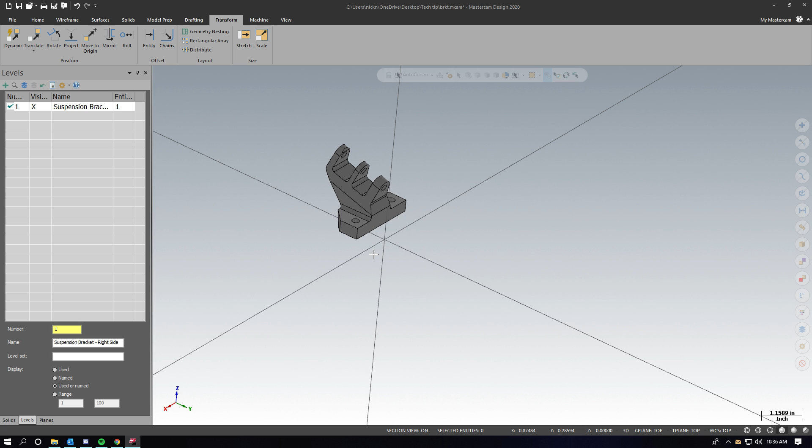So I figured we can make a quick tech tip video on how to bring in vise jaws into your part and set it up so that you can check your holder or your shank to the fixture, to the vise when you're doing a verify of your operations. So I'm going to start with this part we see here. It's a Formula SAE bracket from Mastercam's website.

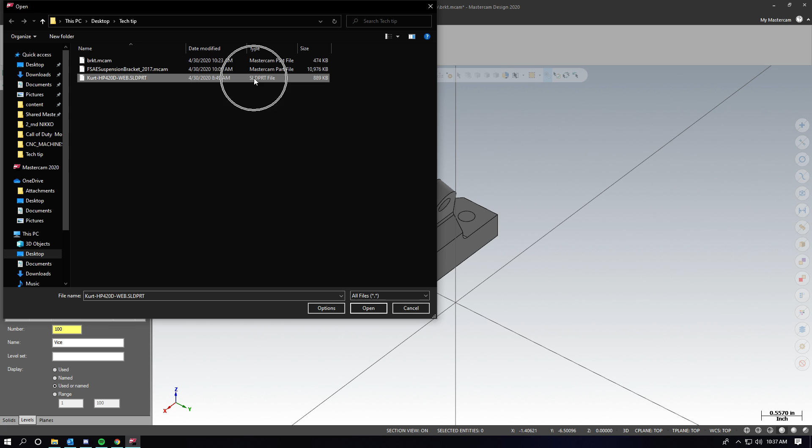When you're bringing in a SolidWorks part file into Mastercam, if it's from, say, SolidWorks 2020 and you're bringing it into Mastercam 2020, make sure you have your first update done. The first update gives you the translators you need to get 2020 part files. Otherwise, you have to bring them in as step files.

So if you're ever having issues bringing in a SolidWorks file, give us a shout. We can help you out there. But most likely we just need the latest update of Mastercam done, and there shouldn't be any problems.

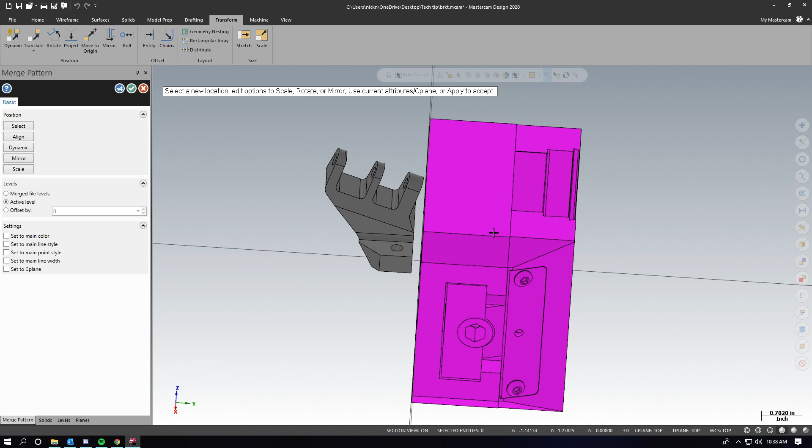So you'll notice that the vise came in at the wrong orientation. That's okay. We're going to move it around using the dynamic translate. So before I hit OK, active level is pretty important. What that does is that level we made before we brought it in, that makes sure that all the geometry will go on that level. If not, it all gets spread out into individual levels, just the way that they designed the vise in SolidWorks with the different features.

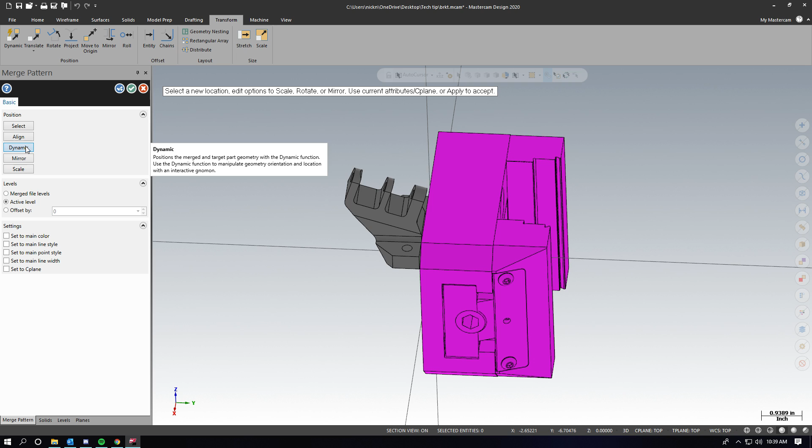So we'll say active level. And we can also dynamically move the geometry right from here, but we're going to do it after. So all the different levels, but everything got consolidated into our level 100. So we can delete everything. We'll just say right click, clear empty levels, clear all.

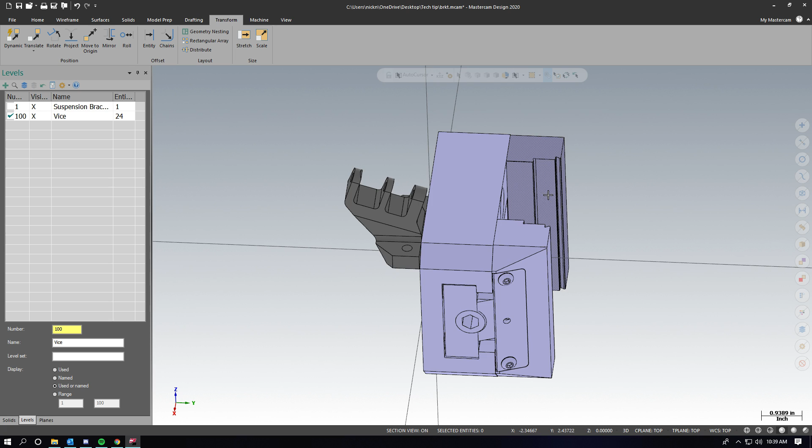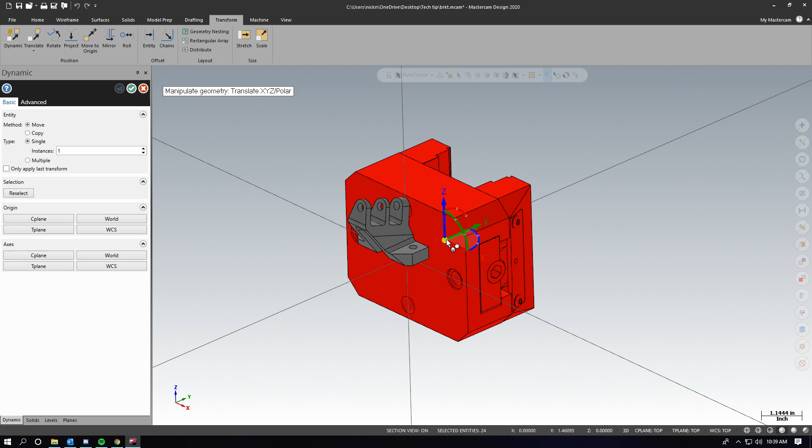Now, let's move this out of the way. So what's nice about using the different levels is we can just right click and say select all. Oh, there's our vise. We'll go to transform and dynamic. We'll grab the center of it. We'll just bring it down. Now it's out of the way. We can spin it.

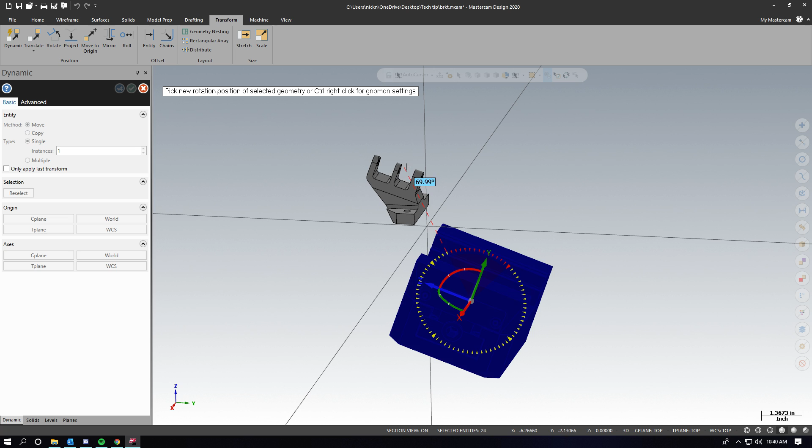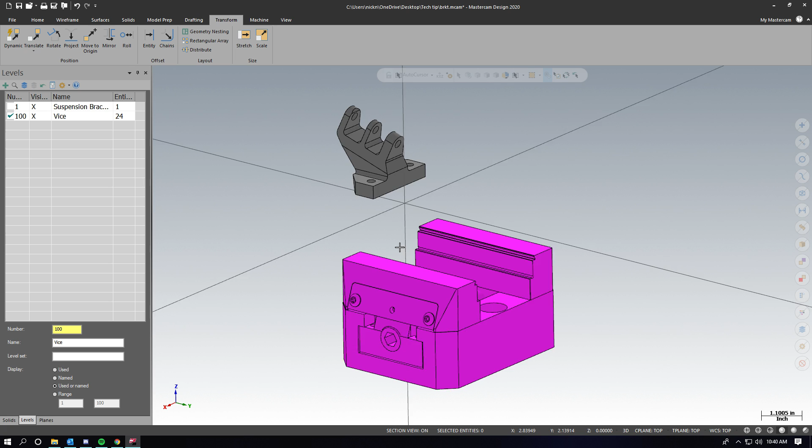Now if we use these tick marks, we'll snap every 5 degrees. If we move our cursor out, we can kind of get any degree we want. And if we just start typing, hit enter a few times, we can go right to 90. When I look at it, I think I want to spin this.

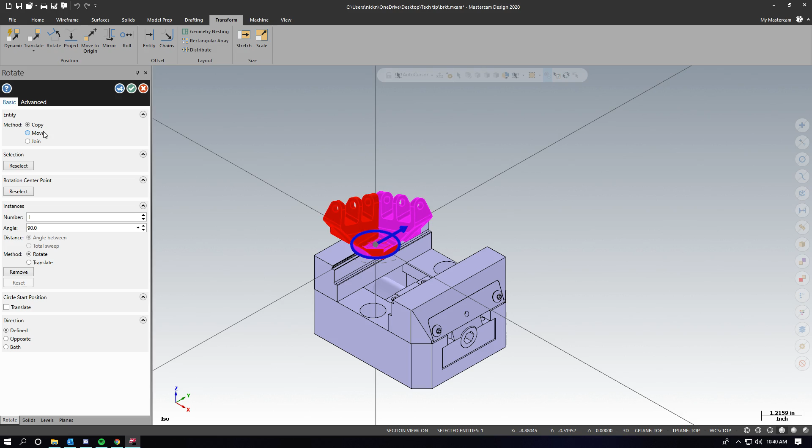So I'm going to say rotate. And I'll rotate it 90. Same idea, we can just type the number in, hit OK. I think I went the wrong way, so I think I'm going to do that one more time. I'm going to say rotate, I'm going to hit the part. This time, I'm just going to go 180.

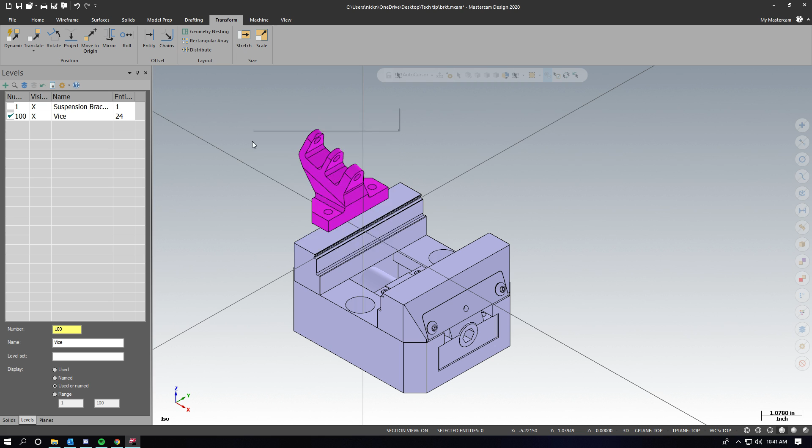It's nice to get familiar with these transform features. Being able to move the part around is pretty important. So we're not going to worry too much about our origin right now. Since it's going on a 5-axis machine, we're going to use our center of rotation. We're going to do that later though. So I'll just turn off the gnomon.

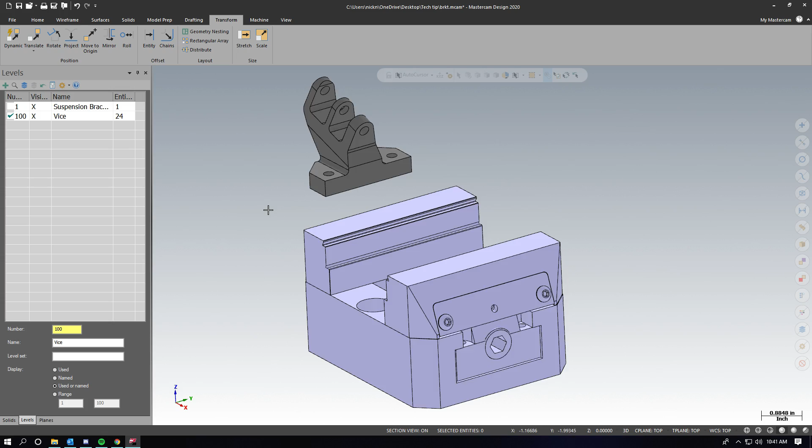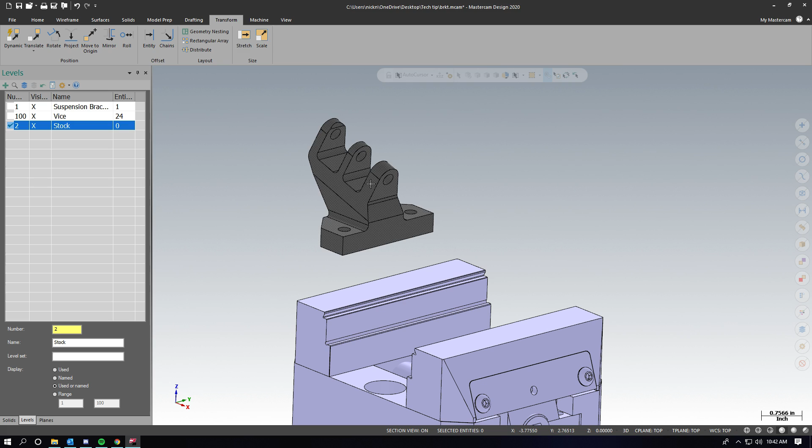Now, we're going to have to set up some stock. The best way to do this is using a bounding box, but again, I'm going to make a new level first. So, new level, stock, select my part, wireframe, bounding box.

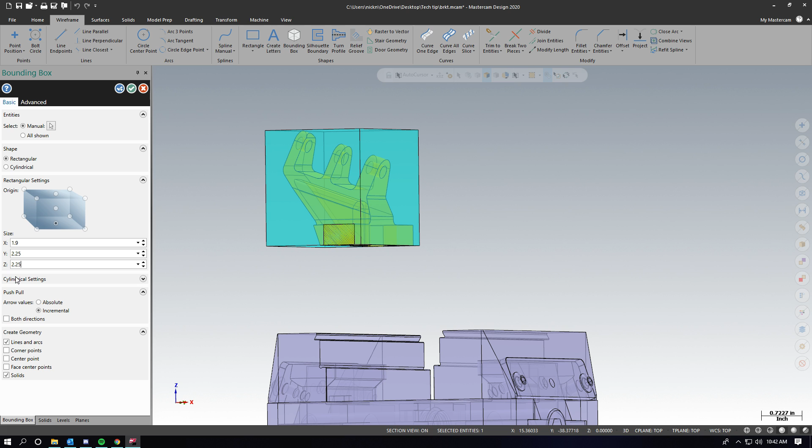Now, I'm not going to get too crazy with this, but our X, we'll give it a little bit extra there. Let's call it 1.9. Our Y, 2.25. And then our Z, give it 2.25 as well. I want to make sure solids is on, and I want to make sure lines and arcs is on.

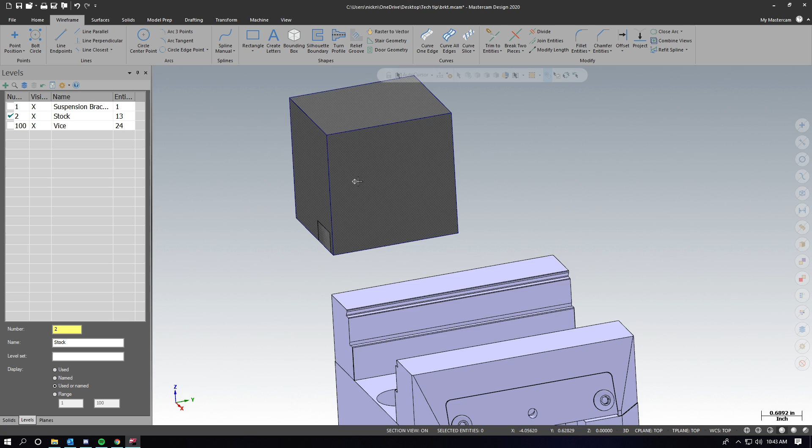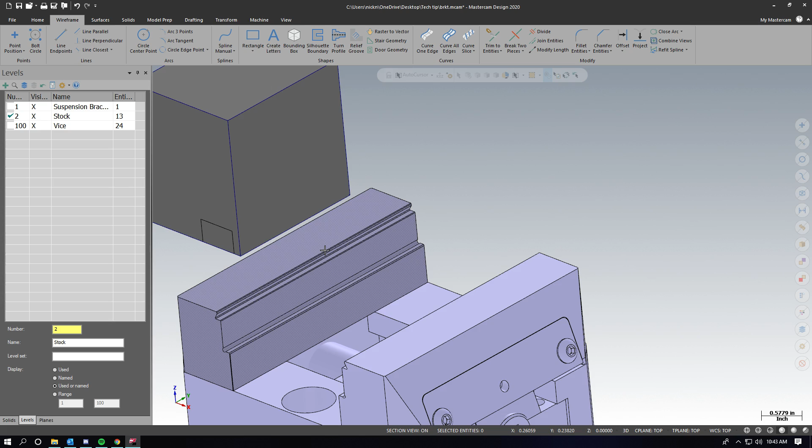So now that I have my stock set up, I'm going to move my vise to fit. I want my part in the center of this vise, since they're just going to clamp down in the center. So one way to do that is to find the center here. Now this will snap right to my midpoint.

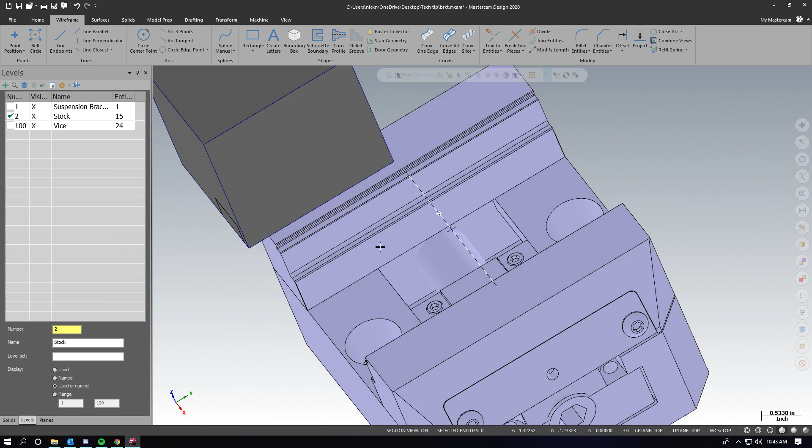So there's the center of my vise. I'm just going to have the top jaws grab it for now. Obviously, there's 10 different ways we can do this, and we're probably going to want to hold on to a little bit more than just that. But for demonstration purposes, this is what I'm doing.

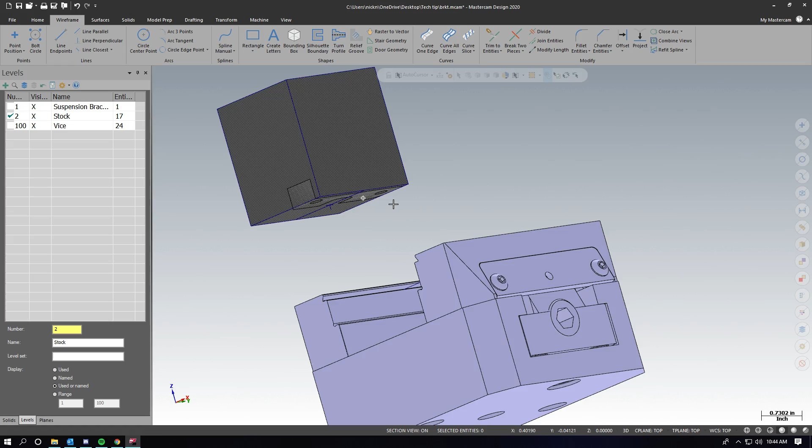Again, just finding center. I'm sure Eric will make fun of me for drawing lines, but that's okay.

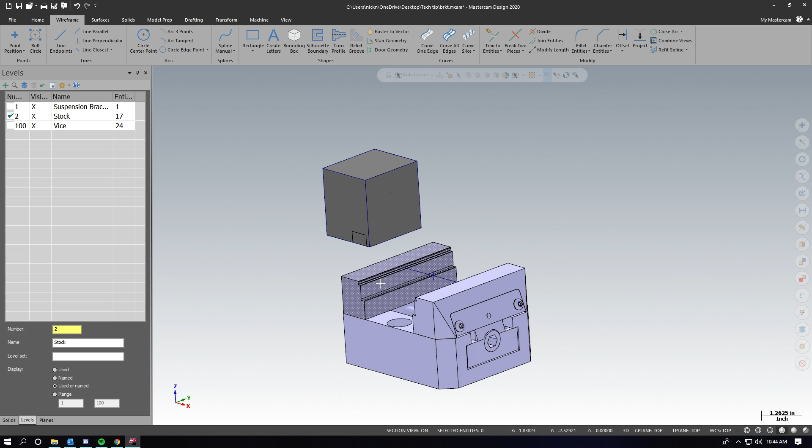So let's move our vise now up, and we're just going to grab onto the part. So since it's all one level, I think I'm going to put these on separate levels so it's easier to move them. We'll cross that bridge when we get there though. So I'll say transform, dynamic one more time. I'm going to put my gnomon right on my center point. I'm going to move that right to my center point there.

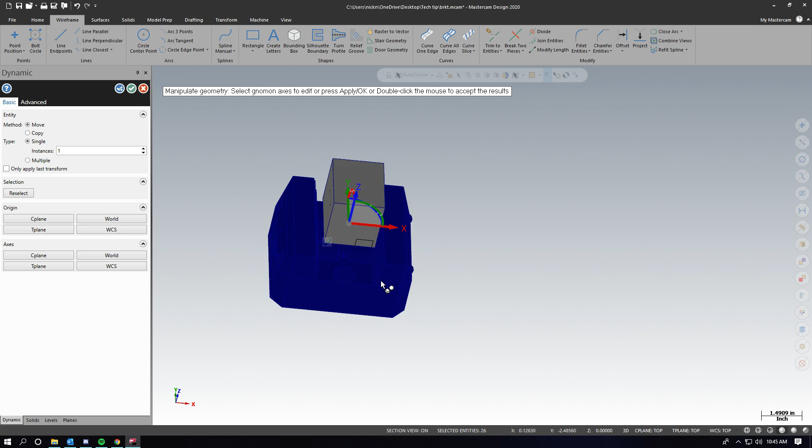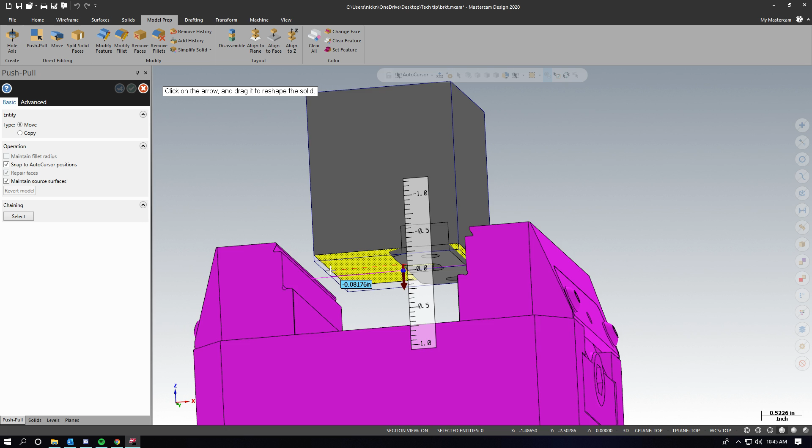And you know, I'm actually going to call a little bit of an audible here. I'm going to take my solid and go to model prep, push and pull. I'm going to move my stock down to here.

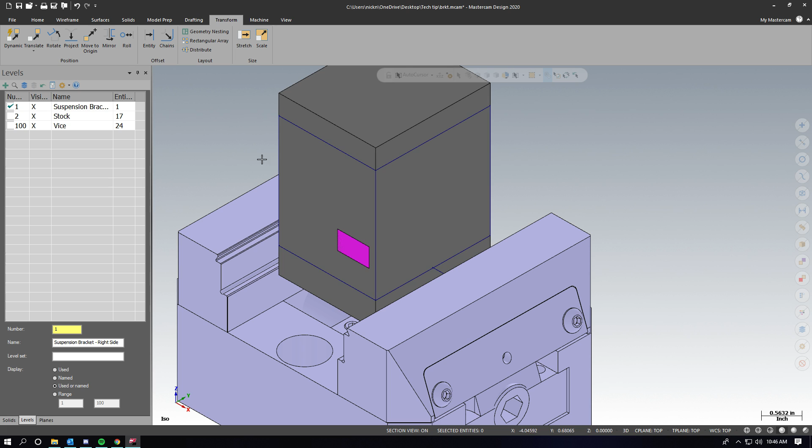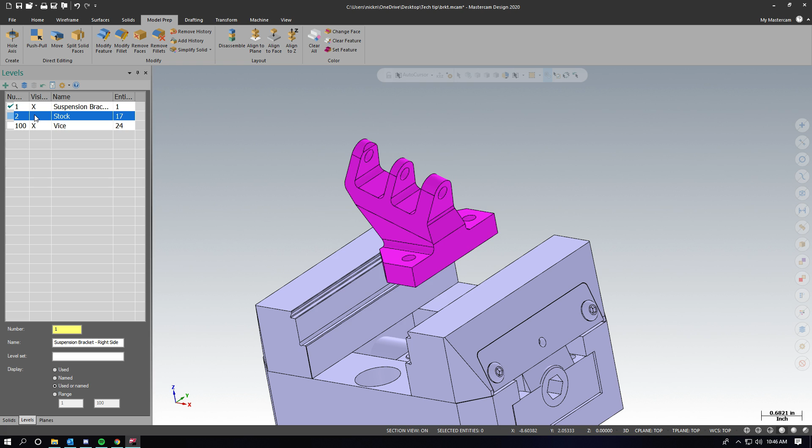So what I just did, I'm just kind of moving using some model prep tools. I can push and pull my stock right now and move my part around. Like I said, I'm kind of just winging this, so I think this is where I'm gonna want it. So now that my stock is accurate to what I want, and my vise is in the right spot, I can move my vise jaws in and just clamp onto the part.

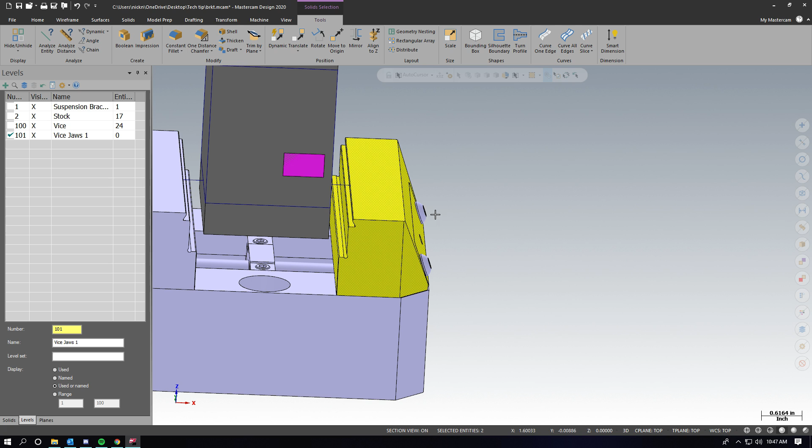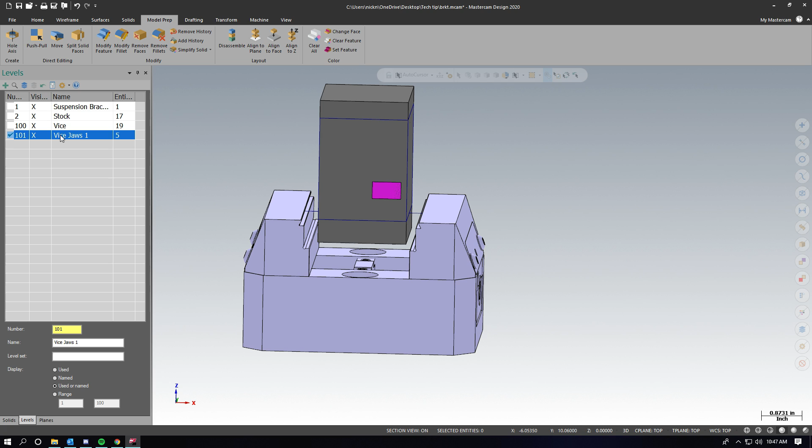Probably a few ways to do this one as well. What I'm going to do is set up a new level, 101. This is going to be called Vice Jaws 1. I'll grab the vise jaws that are going to move. I'm going to right click, move, and I can select Vice Jaws number 1. I'll say OK. That looks like what I want. Now I can right click and say select all entities.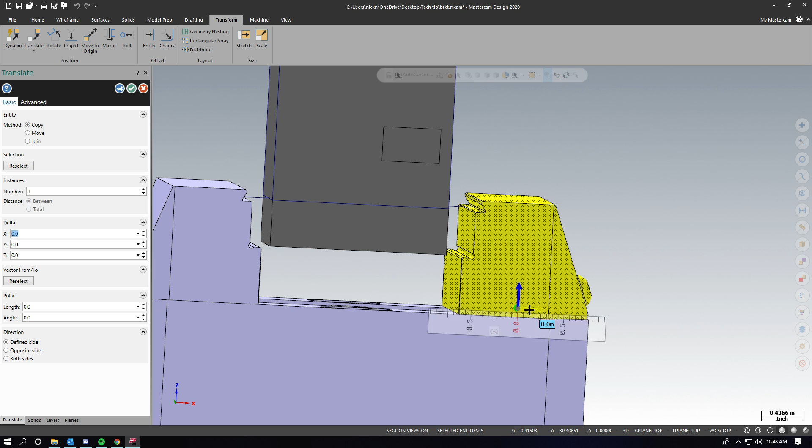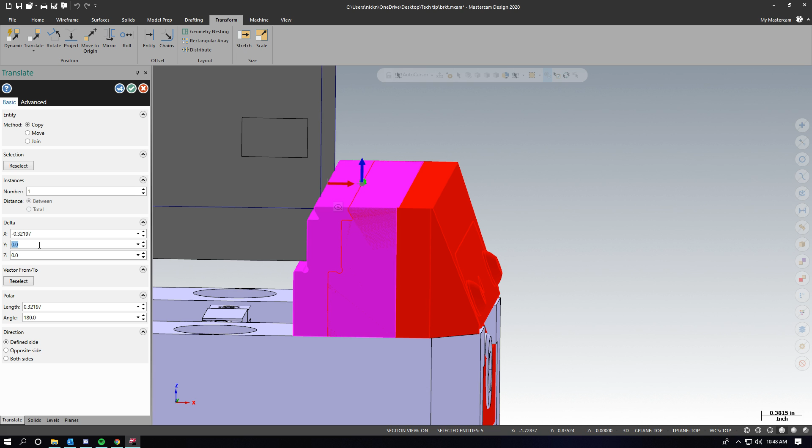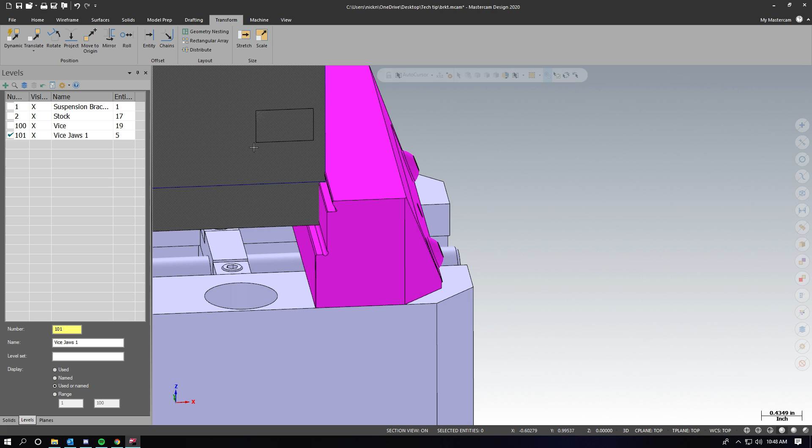We're going to translate this. I'm going to say vector from and vector to. So we're going to move it from here to there. Obviously it moved it down. I don't want that. I just want it to move in the X direction. So I'll say 0 in my Z. I'll say move. Let's save this number. I'm gonna copy that, so right click, copy. I'll say OK. That is not what I want. Let's undo that.

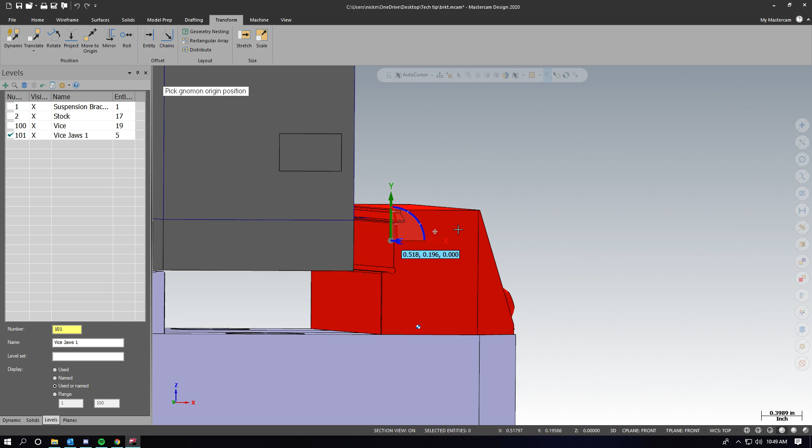We'll say dynamic. We'll grab everything here, and we'll just move it and grab the part. I like dynamic a lot. See what happens when I don't use it? Things don't work out. But that looks pretty good.

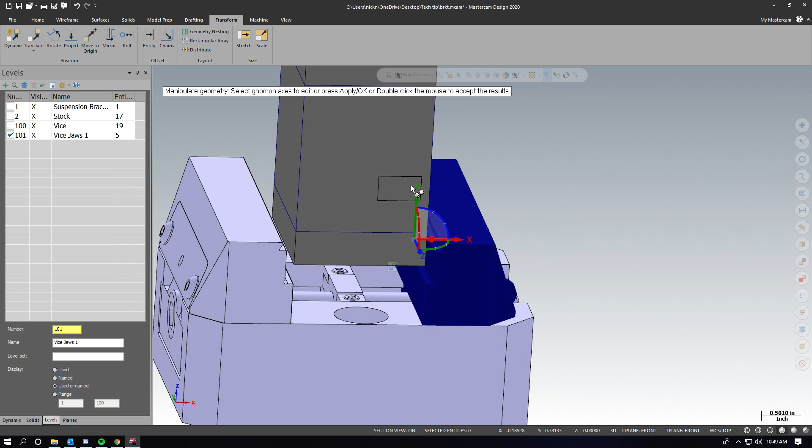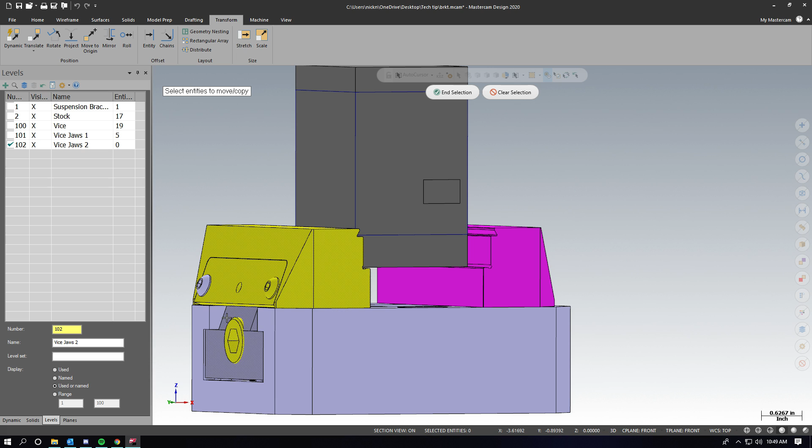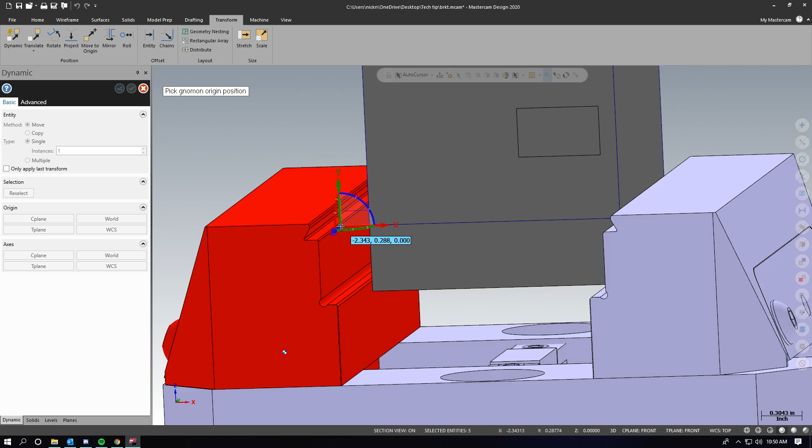We'll do the same thing on the other side. Make a new level, Vice Jaws 2. And then move these. Select all. Dynamic transform. I'll snap to my face, grab my X, snap to my side. Since I grabbed the X, it's only going to move in the X direction. So I could pretty much grab anywhere on this face, and it's going to slide my jaws in the X direction to that face. I'll say OK.

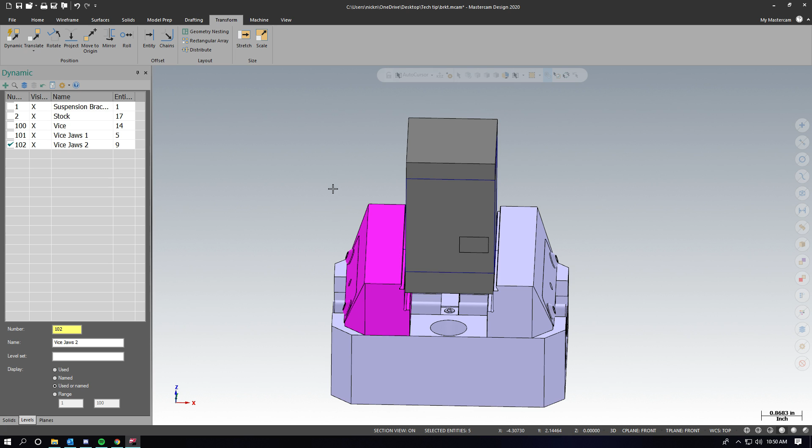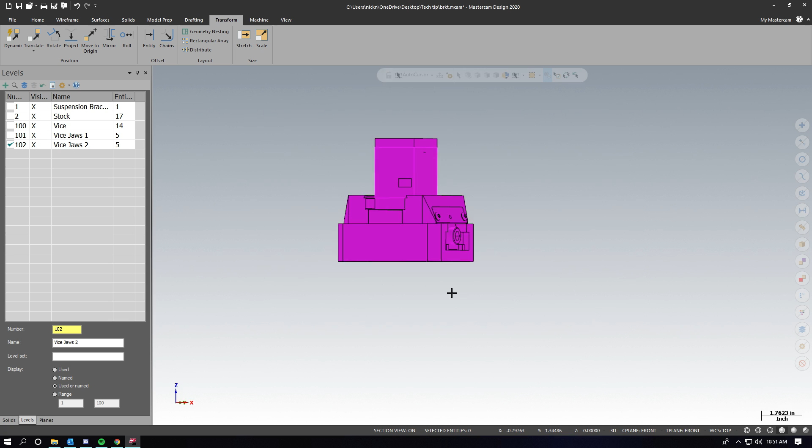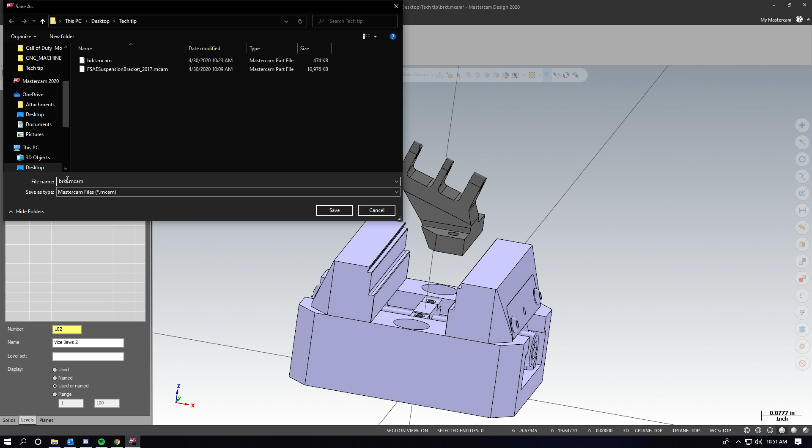And I'll clear colors. So that looks pretty good, and that's how I want it. I'm going to move my origin to the center here. Give it a quick ISO. F9 turns on my crosshairs. We'll take a look at what I got. I can turn off my stock. There's my part. And we'll save it, bracket with vise.

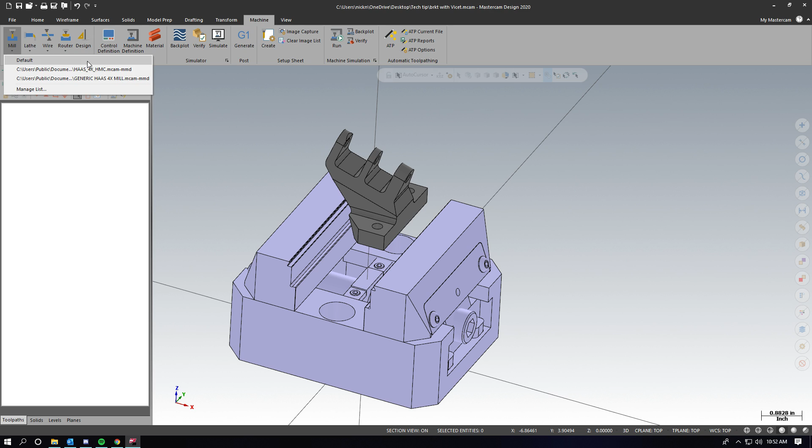So that's how you bring in a vise into Mastercam. And now what we're going to want to do is call our stock in our toolpaths, and then we're also going to want to call our vise our fixture. In another video we can go over basic toolpathing. So for now I'm going to pop open the toolpath manager. I'm going to load up a machine. Just use the mill default.

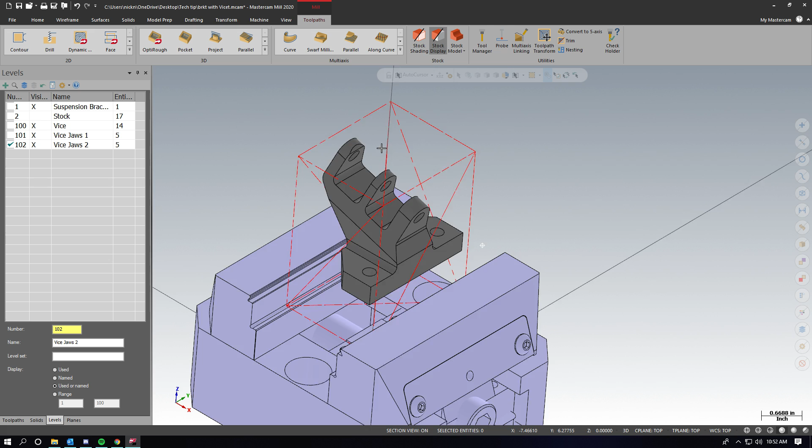Stock setup. Let's say solid. I'm going to select our stock. I can turn it back off, but that's going to be our stock. Now we have to label this as our fixture. What we can do is in our verify options, we'll need a quick toolpath. Do that real quick.

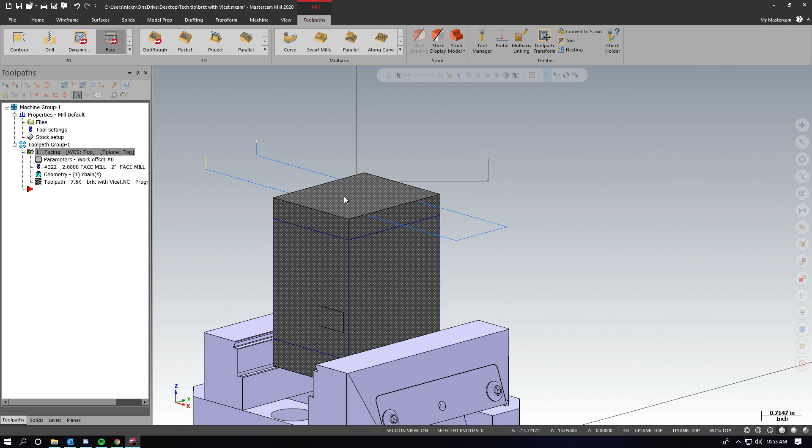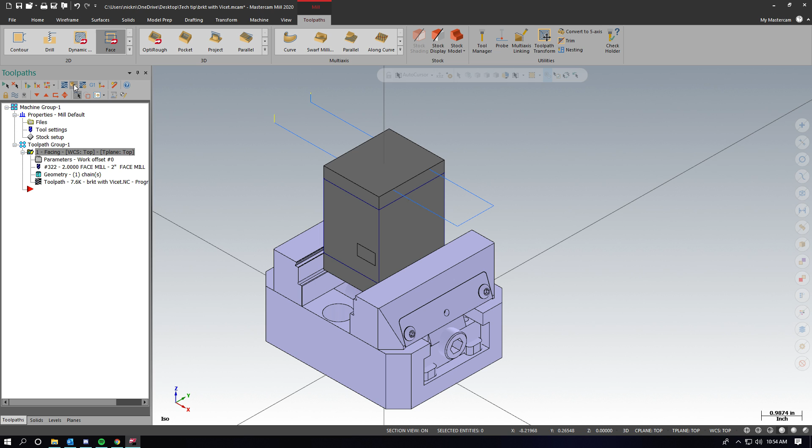So in our simulator options, we can set fixtures, and we can use levels, solids, or files. In this case, we're going to say levels, since we have multiple solids. 100 through 102. We'll hit OK. Now, when I verify selected operations, my fixture is now on its own visibility level, and I can verify against that.

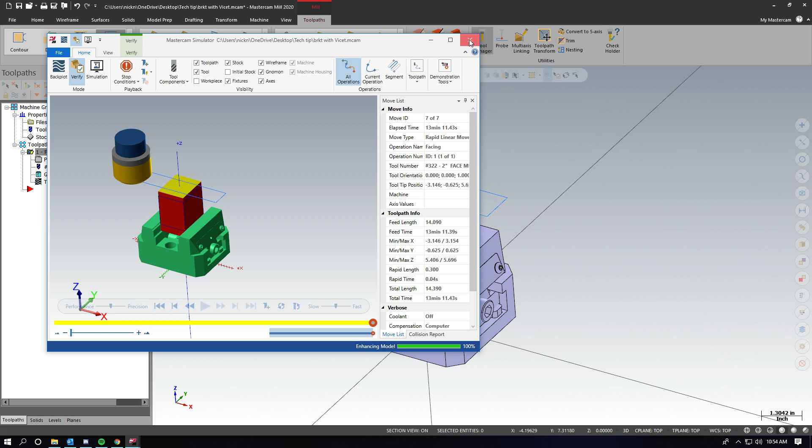So that'll do it on this video.